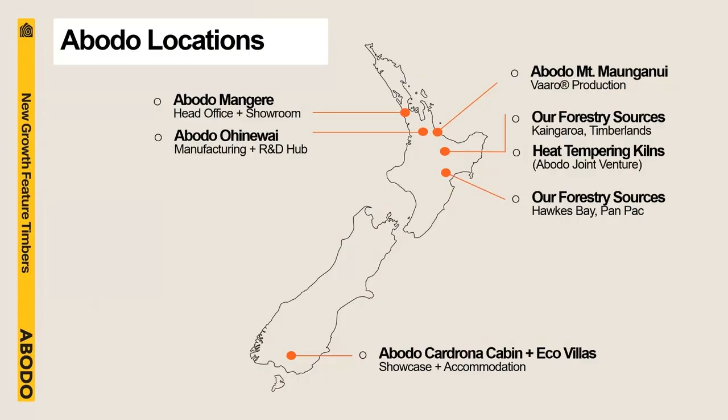All of the timber we source comes from FSC certified forests. The Forest Stewardship Council is the gold label in forest certification worldwide. It provides a chain of custody from the forest through the sawmill to the end user, ensuring the timber comes from well-managed forests. At least 10% of these forests must be kept as native forestry, which encourages biodiversity.

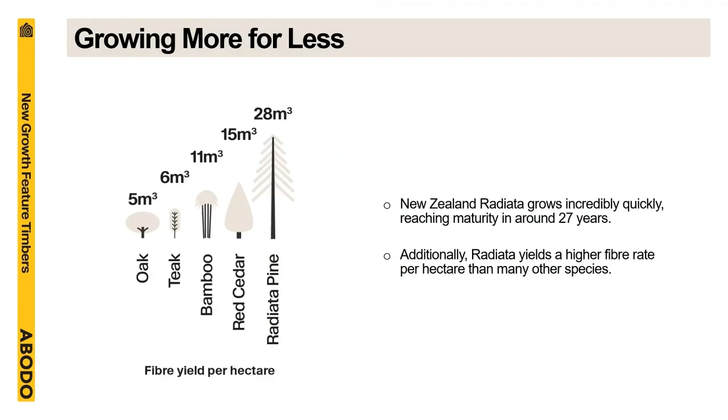One great thing about radiata pine is that it yields more timber or wood fiber per hectare per year than many other timber species. This makes it a great use of our land mass and a very efficient producer of high volumes of wood fiber. In addition, we harvest the trees every 27 years, which means that within the lifetime of our product, at least one tree has grown, making this an infinitely renewable building material.

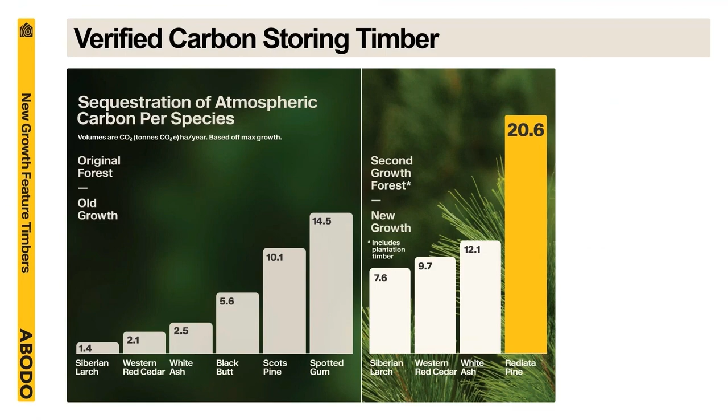Radiata pine stores a lot of carbon, and in this graph you can see the relative amount of carbon that radiata stores compared to many other species. We have an environmental product declaration that shows this data.

So we have this wonderful renewable base material, but we want to create a product that can compete with high-performing old-growth species. To do this, we've developed a process specific to our radiata pine using what we call heat tempering, otherwise known as thermal modification.

It's a three-step process. The first step involves heating the wood gradually up to 230 degrees Celsius. The second step involves holding the wood at 230 degrees Celsius core temperature. It is at this point where the modification of the wood happens. From our research, we've found that 230 degrees Celsius is a critical temperature in order to reach the required durability for exterior use in this particular species.

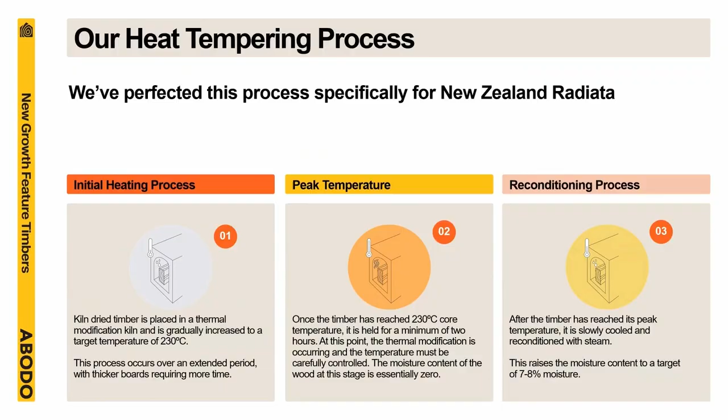At this point, the wood is at 0% moisture content. So the third phase of the process involves reconditioning the timber using steam and bringing the moisture content up to around 7%, roughly half of regular kiln-dried timber. At the end of the process, we end up with a timber that has had a permanent change in the chemical and physical structure of the wood.

It increases the durability class of the wood from class 4 to class 1, according to European standards. And it also increases the dimensional stability by up to 50% compared to kiln-dried radiata.

So we've changed the properties of the wood at this point, but if you recall, we're wanting to provide a high-performing alternative to old-growth timber. So this means not just durability, but even more stability in terms of dimensional performance in service.

So to do this, we have developed a patented proprietary process to orientate grain vertically in every board that's supplied. To do this, we take predominantly flat-sawn, thermally modified radiata pine, and we laminate it by applying a polyurethane glue line to the face of the boards.

This then allows us to create blocks of timber that we can put through a saw perpendicular to the glue line and then create all different shapes and sizes according to the product that we're producing.

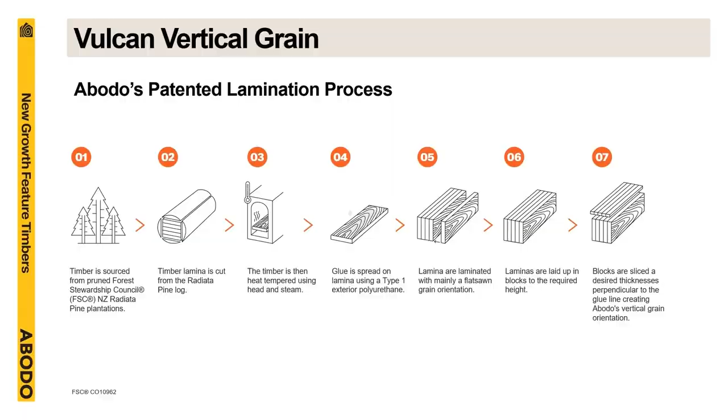The appearance then becomes one that is very similar to old-growth western red cedar and tropical hardwoods. But because of this vertical grain orientation, we also get 50% better dimensional stability when exposed to moisture outside.

The other great thing is the appearance is very aesthetically beautiful, and this really allows us to offer a viable alternative to old-growth timbers. So we've solved the problem of providing an alternative to old growth, but we're still facing the challenge of fire compliance.

And this is where Abodo Vaaro comes in. We consider this the new standard in timber innovation. This is the only ultra-durable, fire-compliant timber available as a complete coated, tested product range, all from one trusted manufacturer.

But why Vaaro? The question around fire compliance really has become more prominent with the advent of the Grenfell Tower tragedy in 2017. This resulted in a mass loss of life, but it also caused building authorities around the world to start questioning both the standards as well as building materials that were going into buildings.

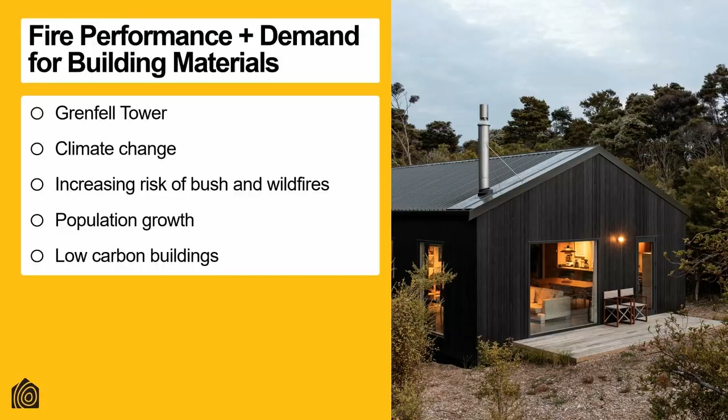So this set upon us a challenge to solve the problem of how do we embed fire safety into timber, but ensure that it stays there during the lifetime of the product. And this is where the Abodo Vaaro project started.

So the premise of the project was to create a fire-compliant timber that performed over time and that the fire retardant did not leach out of the wood in service.

To do this, we proposed that we would use a full cell pressure treatment to impregnate the wood with a thermosetting resin and then heat cure this into the wood cells so that the fire retardant would not leach out when exposed to water. So we started this journey 10 plus years ago, and over the last 5 years have

engaged with testing laboratories and collaborators across 4 continents to really rethink how we are going to present timber in high-risk applications. And you can see here on the bottom left a photo of the small-scale lab testing that we

started with, which allowed us to create small sample sizes that we could then put into a bench scale lab test and start to build up confidence in the performance of the product.

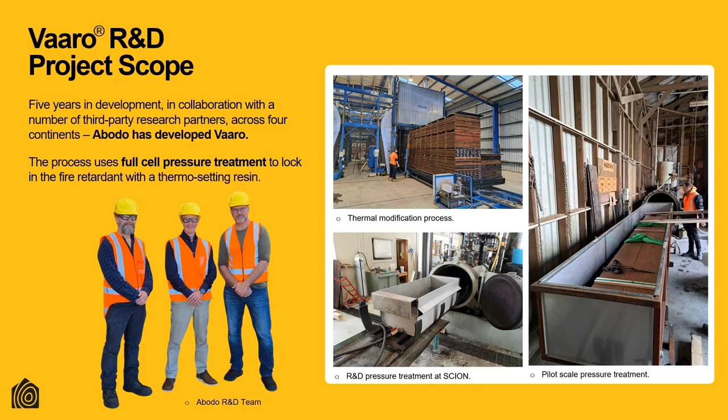At the end of this development process, we came up with what we call triple modified timber. So here we are really transforming the timber at a material level far beyond just a surface treatment.

To produce Vaaro, it's a 3-step process. We start with our Vulcan heat tempering process, where we thermally modify and orientate the grain vertically.

The second step is where we impregnate the timber using vacuum pressure with a resin and fire retardant solution. Through this process, we get full cross-section penetration of the treatment.

This is very important when we are talking about exterior use timber, as well as the ability to remachine the timber after it's been modified.

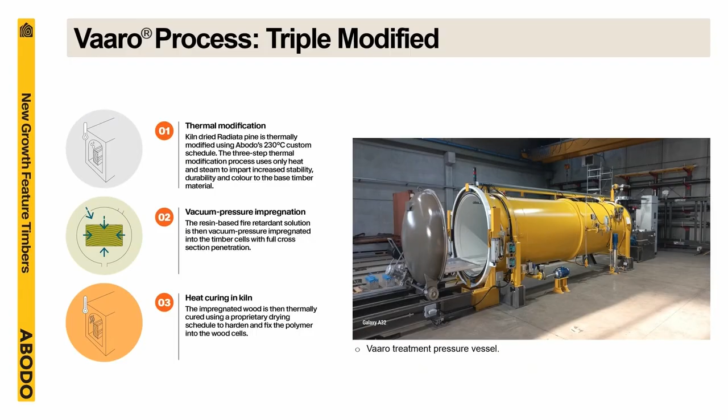The third step involves applying high temperature to cure the resin into the wood cells. What this does is permanently fix the resin into the cells of the timber and bind the fire retardant into the process. At this point, we end up with an ultra durable and highly leach resistant timber product.

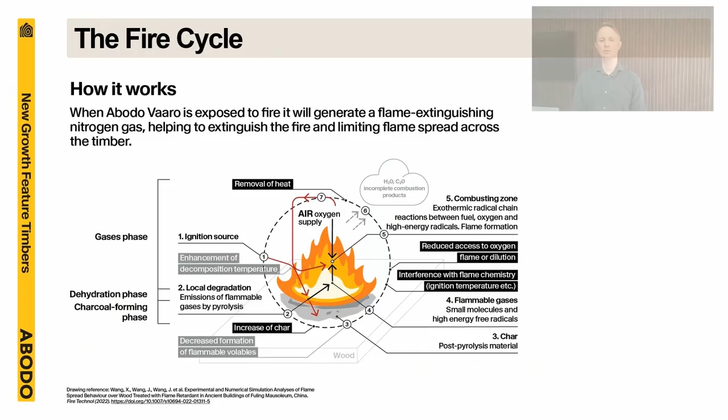This slide shows the fire triangle. Here we have the ignition source, a burning source, a material, and then oxygen. These are the three elements required to generate a fire.

The way Vaaro works is that during the initial charring of the surface of the wood, nitrogen is released, and this in turn blankets the surface of the wood, which doesn't allow the flame to continue to burn. This is what limits the flame spread across the face of the wood.

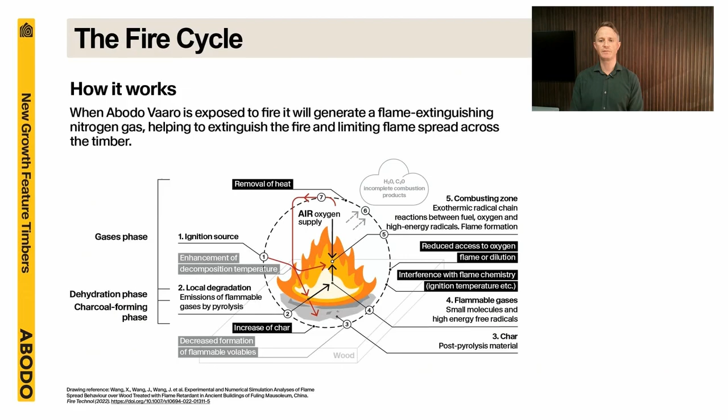So looking into where we started on testing. Testing is really the critical piece in this product, in that it demonstrates our compliance with the various standards around the world.

We started with the ISO cone test, which is an ISO 5660 test, a bench scale test that takes small samples of wood, 100 by 100, and creates a classification from this. This really allowed us to start building up confidence in the material and that the treatment we were applying to it at different levels could meet the various standards we were looking to achieve.

The other great thing about this test is it's recognised under the New Zealand and Australian standards. Through this testing, we achieved Type A cladding for New Zealand and BAL 29 for bushfire use in Australia.

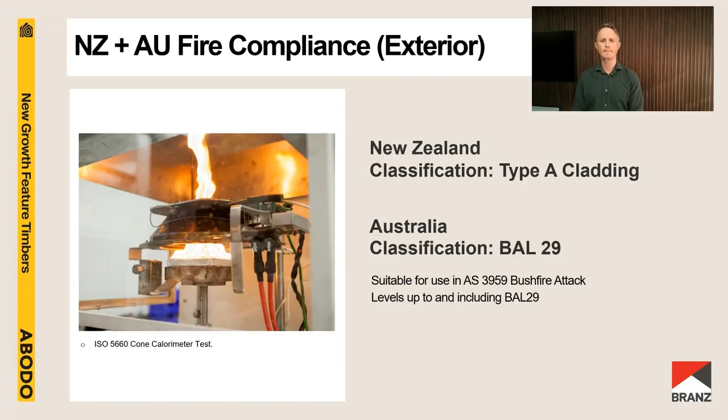Once we'd started to build this confidence in the product, we went to larger scale test methodologies. This one here is the ISO 9705 full-scale room test.

Here we achieved Group 1S for New Zealand and Group 1 in Australia. This is a spread of flame test that is recognised for interior applications in these two countries.

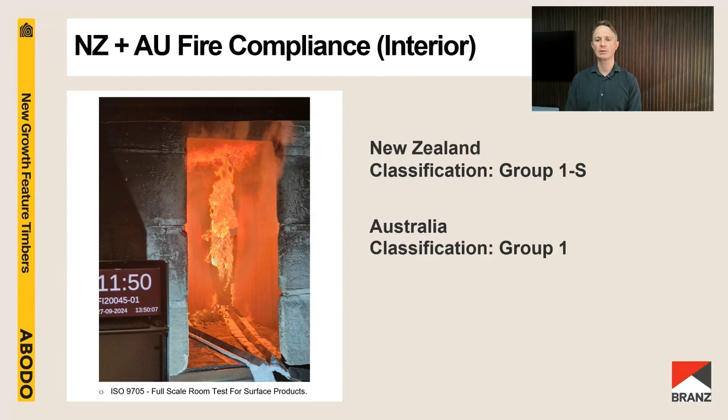For the EU and the UK, the EN 13823 single burn item test, or SBI test, was used. This is a slightly smaller scale test, a 1.2 metre high wall in a corner configuration.

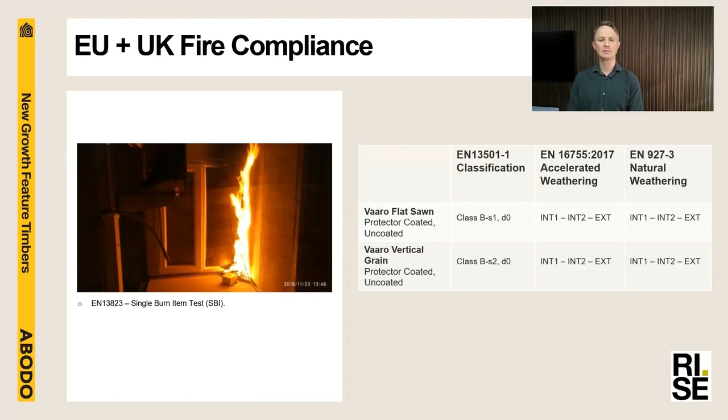Through this testing, we achieved Class B according to EN 13501, which is the highest classification for wood. We also achieved this classification after pre-weathering according to EN 16755. I'll talk a bit more about that in a minute. This testing was conducted at RISE in Sweden.

For the USA, this country and market recognises a slightly different test method called the E84 tunnel test. This is a horizontal machine that has a 24-foot long wall section in it, which then has a heat source introduced at one end.

In this testing, we did the 30-minute extended test that is recognised in the California WUI standards. Through this testing, we achieved Class A, with a flame spread index of 0.

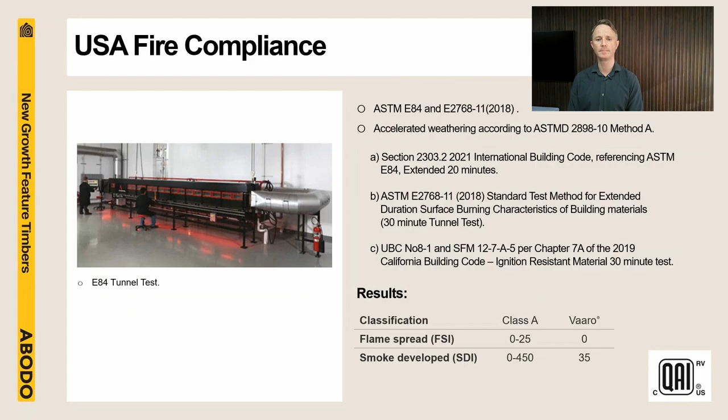Again, this testing was conducted before and after pre-weathering at QAI in California. While it's relatively easy to actually pass these tests...

...before the leaching process, the real challenge was passing the test after the pre-weathering step, which is often called up in most international standards if you're putting the wood into an exterior application.

The reason this is challenging for fire-treated timber is that many fire-rated chemicals are hygroscopic, meaning once they're exposed to water, they can leach out of the wood. So we wanted to be very clear that our product would perform at the highest level after being exposed to the weather.

In our case, we actually weathered full-length boards where possible, so 1.2, 1.5 metre length boards, not small pieces. Then we conducted the test. Then we have natural weathering.

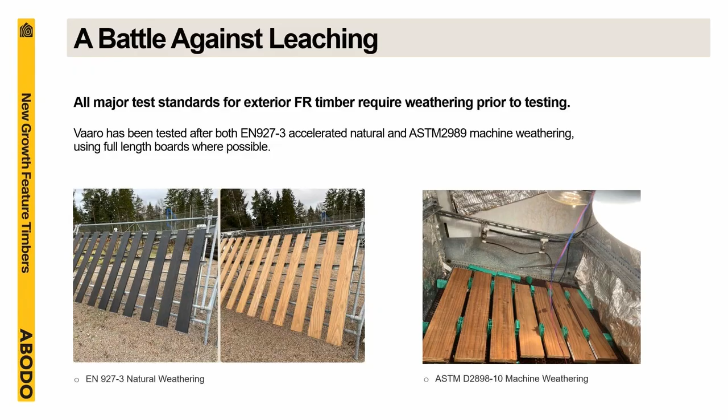EN 927-3 is a natural weathering standard. On the left there are full-length boards put into an accelerated weathering situation outside, and then we test the boards after that weathering process. Through all of this testing, we built up very high confidence in the ability of this product.

Coatings are notoriously difficult to apply to many fire-treated timber products, so we wanted to be sure that we had a fully tested combination of our coating with the base material. So here's a test.

You can see a photo here showing the Vaaro on the left. The first 3 boards are protector coated boards with our semi-transparent wood stain, and the 4th board is left uncoated, weathered for 18 months. Uncoated, the timber weathers to a nice gunmetal grey, but you get very good coating performance on the timber, compared to the far right which is a competitor fire retardant impregnated into our Vulcan product with the same coating applied. As you can see, early failure of the coating is occurring.

So we feel it's very important to test the combination of coating and base material, to give customers confidence that in the long run they're not going to have any problems.

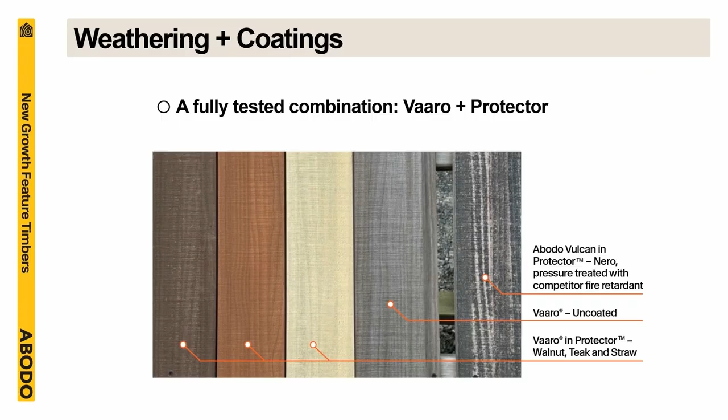The Vaaro product is available in a range of colours in our protector range, but because the wood maintains its natural tactility and machinability, it can still have the same bandsaw, dressed, or brushed finish applied to the surface of the wood. This is great because you still get that natural wood materiality that everyone really wants to maintain.

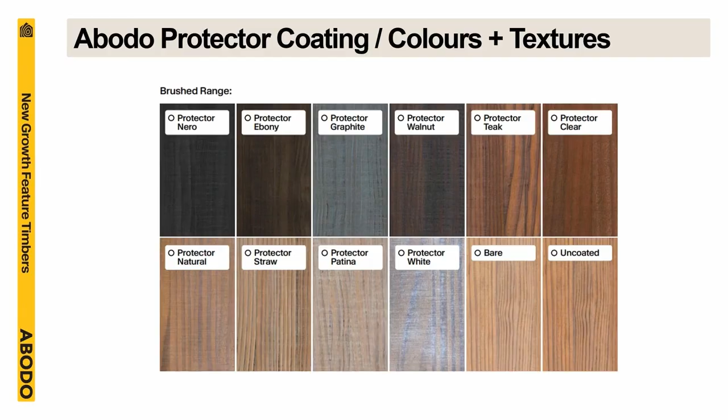What we found through our testing is this process imparted more than just fire performance. We conducted testing to European standards for in-ground testing, and the product performs to a Class 1 durability standard, otherwise known as Use Class 4, similar to old-growth tropical species of high durability. This has really allowed us to offer an extended 40-year durability warranty for the timber.

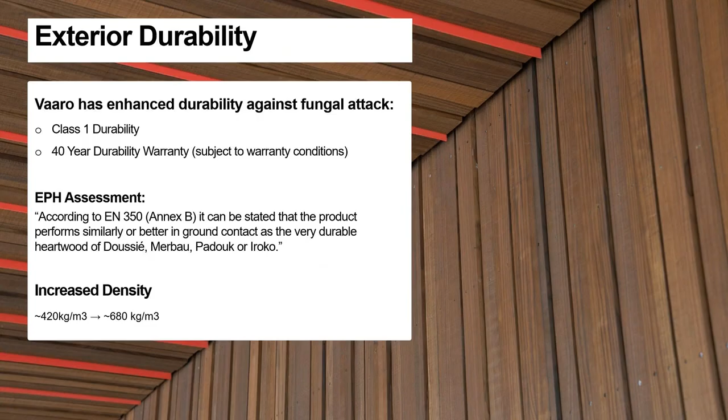Similarly, the properties of the wood have changed, so the density is increased from 420 kgs per cube up to around 680 kgs per cube. This makes it more resilient and gives it a higher level of hardness.

We conducted termite testing against the Formosan termite and found that the Vaaro had excellent resistance to this termite, one of the most aggressive in the world. As you can see on the right, untreated radiata pine is fully destroyed while the Vaaro remains intact.

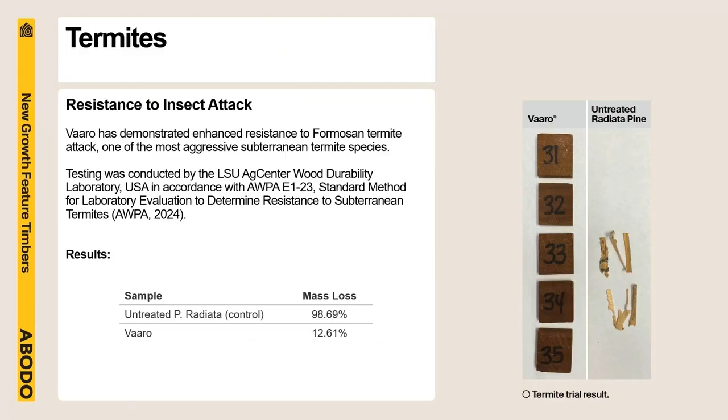In terms of environmental compliance, Vaaro is not classified as harmful to health or the environment under the European REACH regulation. Because it's also a water-based treatment and does not contain any heavy metals, halogens or sulfates, which are typically contained in traditional fire retardant treatments, in its final form the product is non-hazardous.

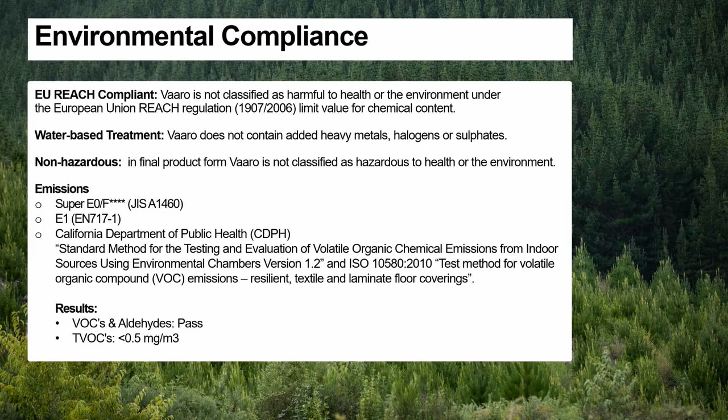In terms of emissions, we have tested to a number of different standards around the world. The Japanese A1460 standard, where we achieved E0 or F 4-star. We tested to the European standard EN 717-1 and achieved E1, the highest classification. We've also tested to the California Department of Public Health standard, arguably one of the highest standards for VOCs, and there we passed.

In terms of the finished product, the focus is really around exterior cladding, screening, and internal lining. One of the great things about this as a base material is because we're getting full cross-section penetration of the treatment, we are able to supply our distributors with rough molder blanks that can then be remachined, subject to some limitations, to create all different shapes and custom profiles for customers.

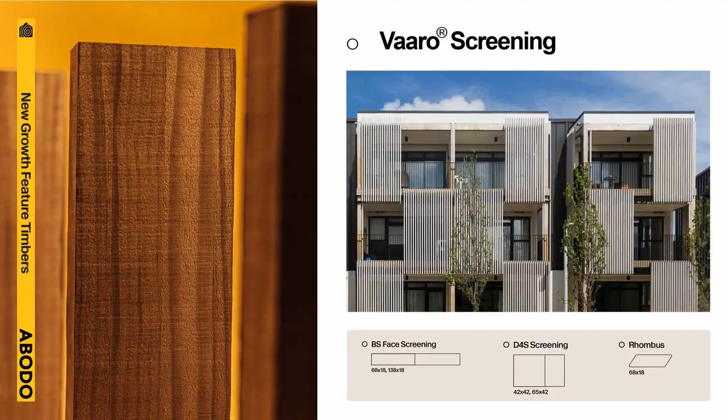Screening products could be used both externally for rain screen, but also internally. For interior paneling, walls, ceilings, and soffits, we have both an 18mm and also a 10mm thick product.

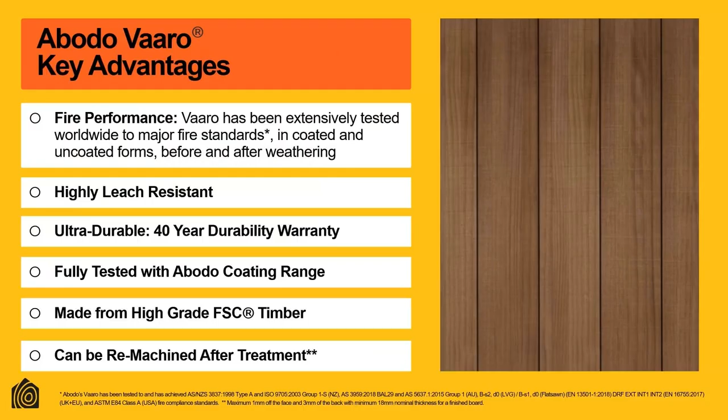So in summary, what we've created here is really a product that redefines what timber can be. You've got fire performance, durability, and full product level design, so that we can really give confidence to you as designers, engineers, and builders that this product is going to perform in the long run with confidence, safely and beautifully.

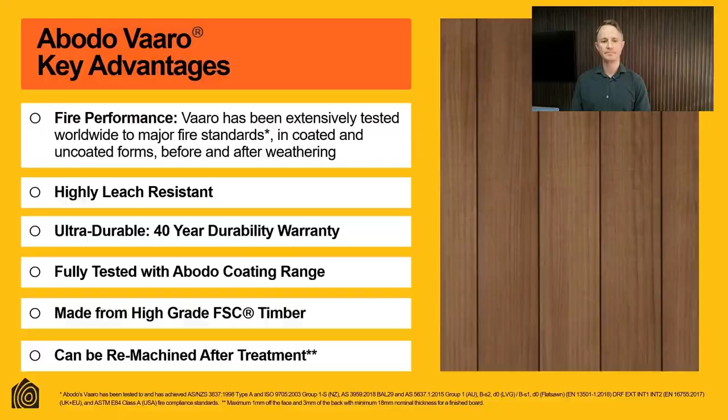Welcome guys to this Fireside chat, where we're going to talk about where fire compliance meets reality. The purpose of this conversation is to really do a deep dive into some of the universal frustrations experienced between where we have a compliance path specified in our practices, and then when it gets executed on site, and what the implications are there in the real world.

So I thought we'd have a bit of an honest and open discussion in terms of the New Zealand context, particularly where we're operating. I thought we'd start with opening and talking about the ideal versus the build.

In principle, compliance frameworks are pretty robust. We've got standards that we're working to. So where, in your guys' opinion, do things break down in reality? Maybe we start with you, Martin, and get your perspective.

Fire design and the transfer of fire engineering information to the construction site is actually quite a complex process. Our building codes specify a certain level of performance, and the fire engineers generally understand that, and what sort of systems are necessary to be put into buildings to achieve building code compliance. Often that involves quite a high degree of technical understanding, technical analysis, engineering judgment, and that's transferred into a description of a solution which needs to perform in a certain way.